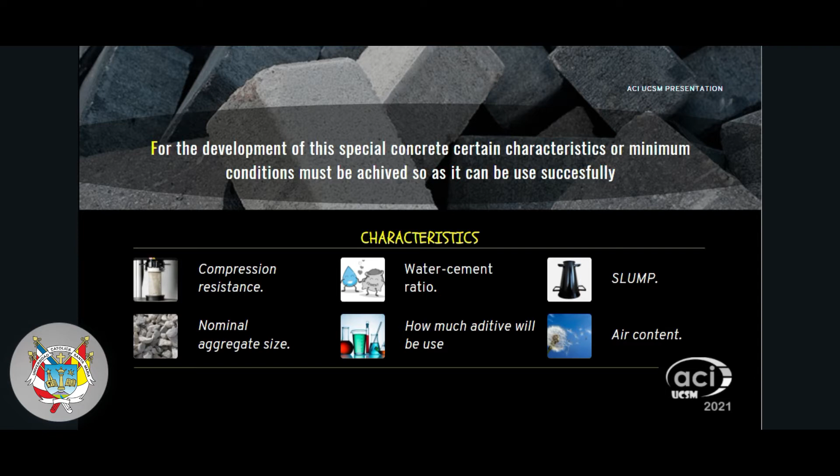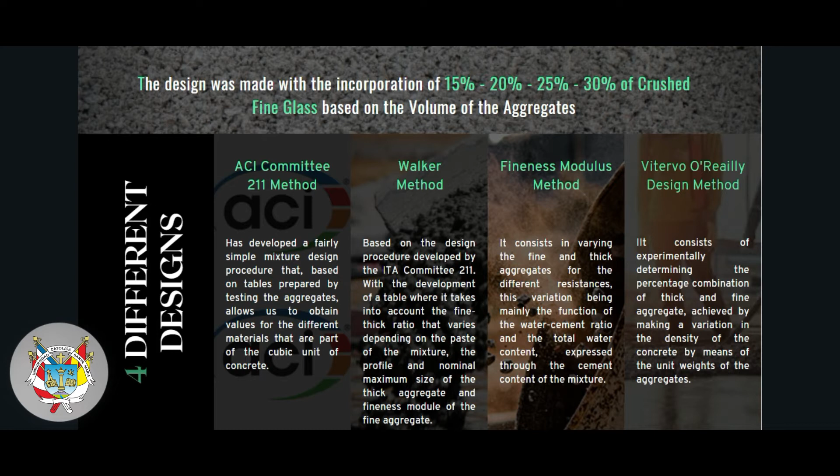Now, to reach these conditions, four different designs were made, considering four different percentages of crushed fine glass based on the volume of total aggregates: 15, 20, 25, and 30%. These four were made using four different methods of mix design: ACI 211, Walker method, Fineness modulus, and Vitervo O'Reilly method.

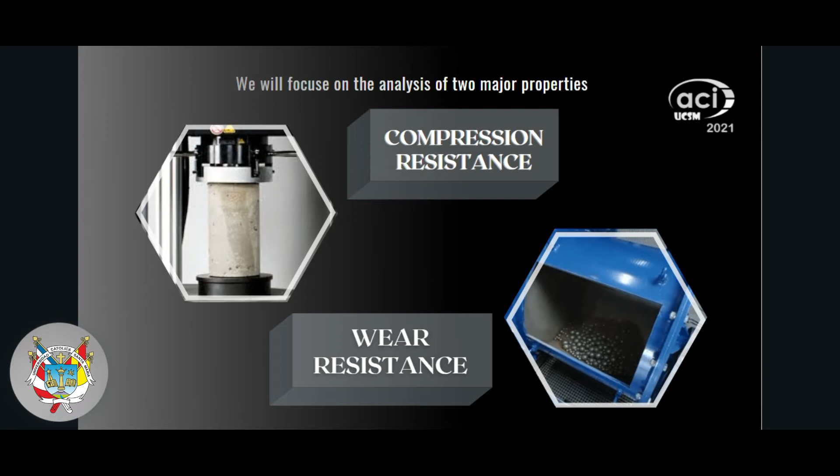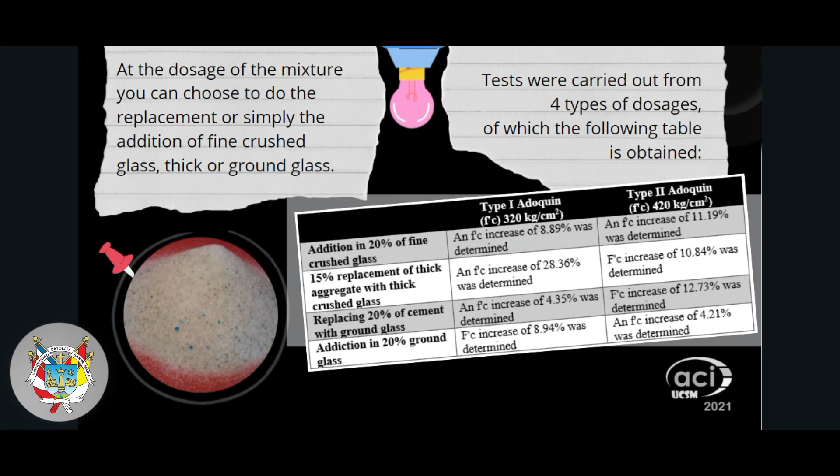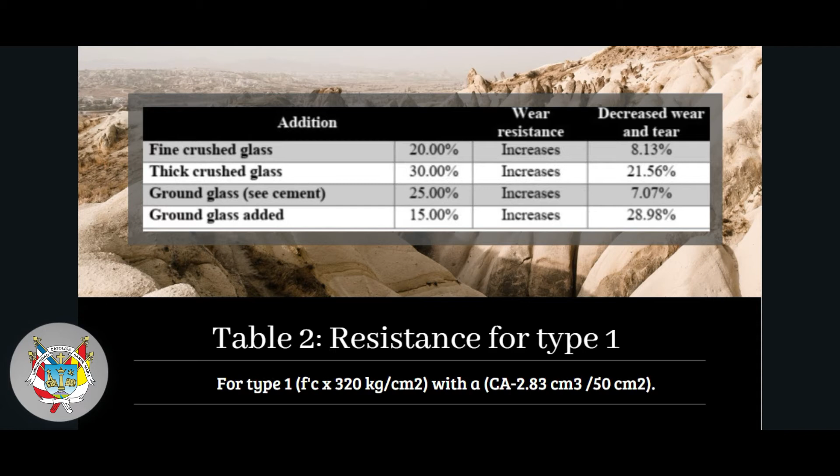Now I'll explain the physical properties analysis. Two major properties were studied: compression and wear resistance. In the compression resistance, we obtained the following results on two types of paving blocks, with different critical resistance expectancy on each one. Then for the wear resistance, we got these results for type 1 block and these results for type 2 block.

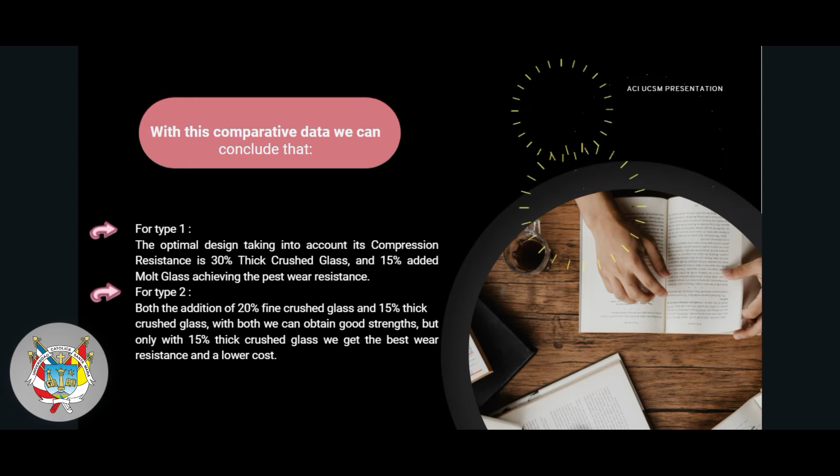With this comparative data, we can conclude that in type 1, we achieved optimal compression resistance design with 30% of thick crushed glass, and 15% of added molt glass also got those results, and also the best wear resistance. In type 2, with 15% of crushed thick glass, we get the best properties, but the 20% of added glass isn't that bad either.

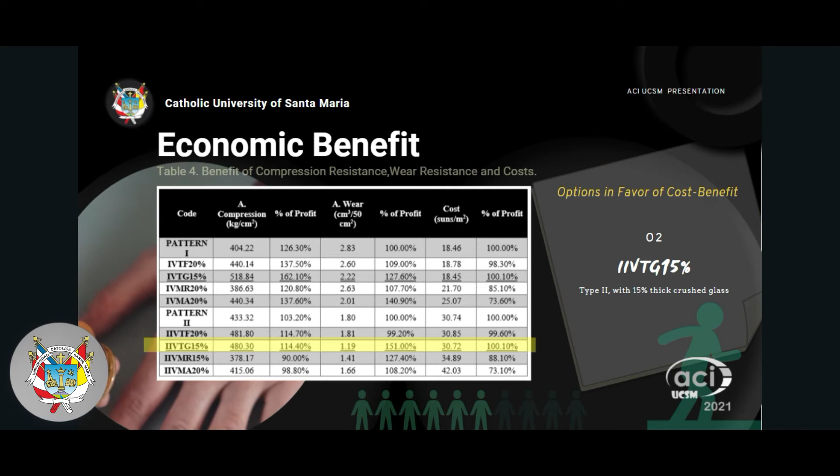Then we get to the part of economic benefit per square meter. We got these results using the different percentages in type 1 block, where we can conclude that the best option in favor of cost benefit was IVTG 15% in type 1, which got first place in actual compression and second in wear resistance. And then in type 2 it also was the IIVTG 15%, but it got second place in compression resistance and first in wear resistance.

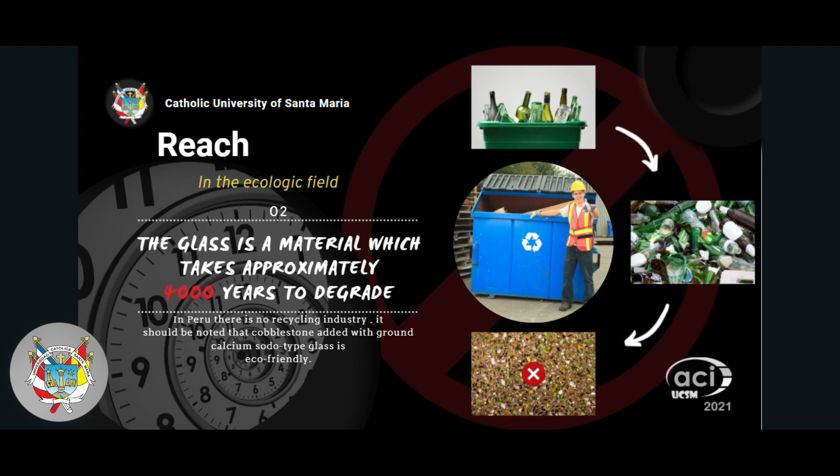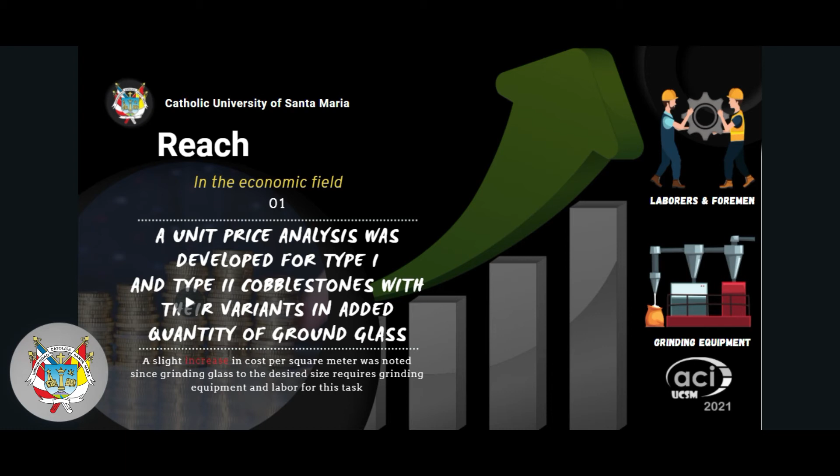So now we can name the different applications and reach of these solutions. First, we could reduce the emission of waste material due to construction and glass, because we are reusing it. So we are eliminating a 4,000-year life expectancy waste from the environment. And on the economic side, there could be a little percentage of overpricing in comparison to the normal unit price of paving stones, but is it worth it in the long term?

In application, these units could be used in any place with moderate exposure to moisture, such as our city of Arequipa or the southern part of our country, Peru. The usage of these paving blocks should be restricted to low velocity roads, so for a downtown they are the perfect materials. Why should the public be interested? Because they use it every day and they will be interested in knowing about a material that is cheaper in the long term.

So now we can conclude that the paving blocks are very profitable in many aspects, such as the economic side and technical side. And the established proportion should be respected so as to reach the perfect conditions in which these blocks will be used.